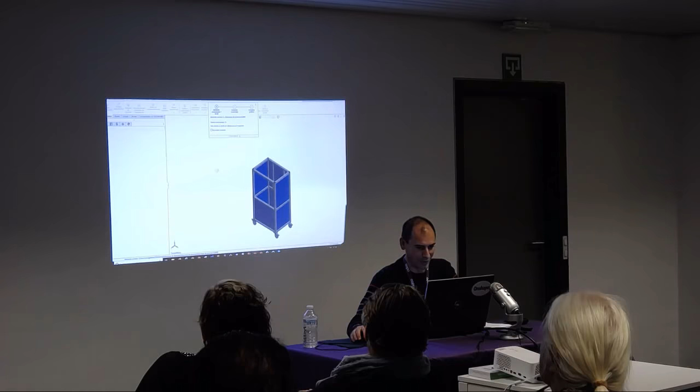Take a look. I will pick a file in SolidWorks. This is an easy and simple project. But with this easy and simple project, you can figure out what we can do with a more complicated project. I don't know if I will show you the exportation part, because we are dealing with an issue, and a partner of our company is working on that and has sent me the new release.

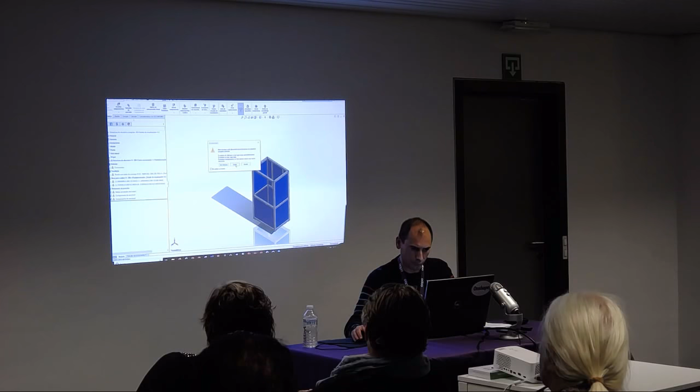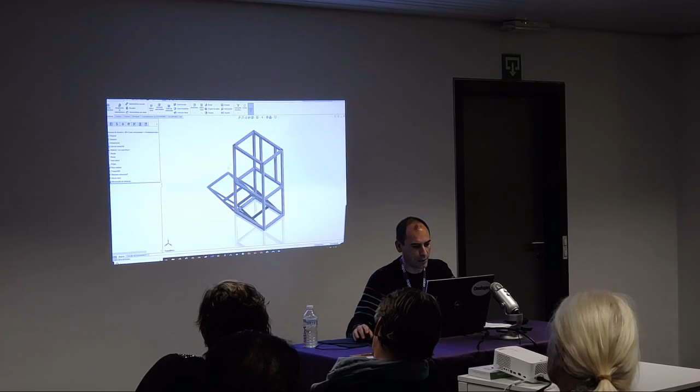Okay, so this easy project is welding profiles, but it's aluminum profiles. There are no weldments, but we treat it like they were weldments in SolidWorks. So that's a part file, yeah? But that part file has more information there. All these are components. All these have a serial part, a serial number, a part number. All these components have properties. We need to set this information.

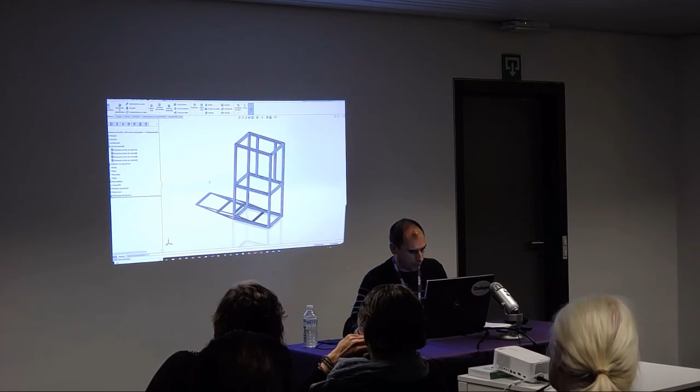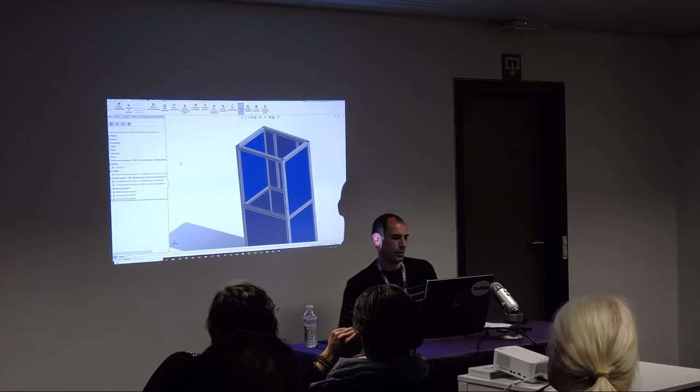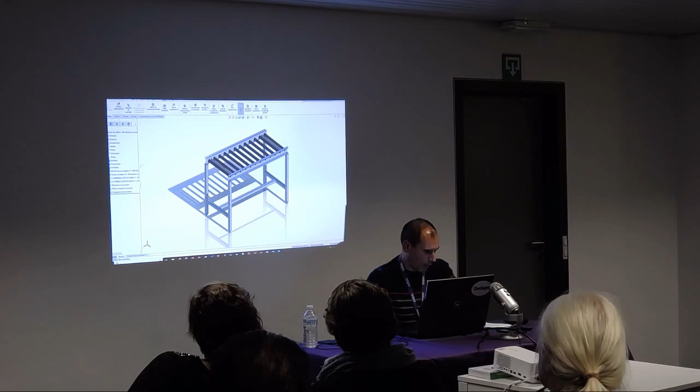The same way with another simple project. I created this in SolidWorks 2015 and I'm opening it with the last release. But here we have welding profiles. In this example it's the steel profiles. We have here, in this case, a full structure of assemblies. As you know, this is the profiles, just the profiles.

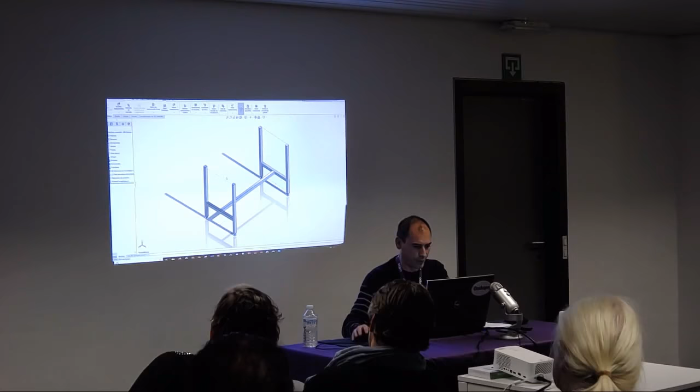Then we weld these components and these ones, and we are sorting this component and so on. So in this one, we have two configurations. Right now, no, because I have to create the drawing, because if not, the drawing is not created, the sheet metal part is not created. But we have two parts here, really. The first one is that one, the folded one, and the flat, right?

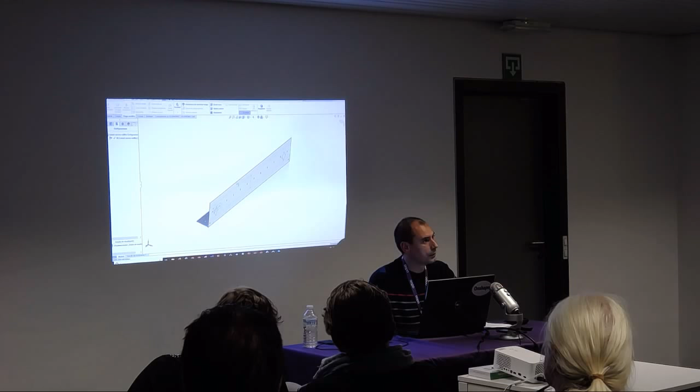So if we are going to create a part, a component like that, based on a flat component like that, we are going to create a folded component. We have a bill of materials there. Yeah, we are going to create a manufacturing process with this component, a CNC or so on.

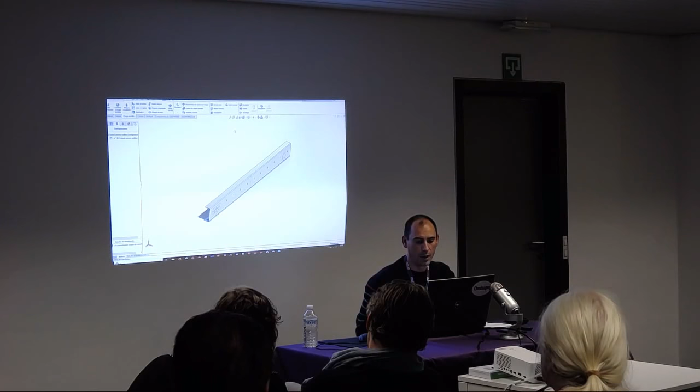We need another bill of material level. If we are going to create more processes, we need more and more levels. So we handle that part.

We can create these extra bill of material levels. For instance, if we set a property telling that that part needs painting or a superficial treatment, we can figure out if we handle it with manufacturing routes or with bill of material levels. We have both options.

So next, what does the project include? That project is a project of implementation, including the training, setting up, and the technical support. Both are mandatory the first year, and then the yearly program integrates the CAD and ERP system. It's a yearly program, so there is a yearly maintenance fee.

There are no temporary limits, there are no functional limits. So if a customer starts this project and the second year doesn't want to keep the program, they can still work with this project, this program.